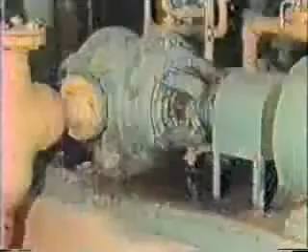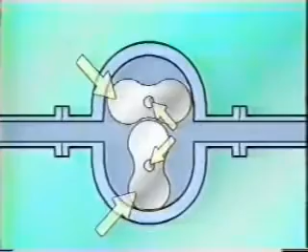The first one we'll look at is a lobe pump. Lobe pumps are a lot like gear pumps in that the process liquid is trapped in spaces and forced out of the pump, but the moving parts in a lobe pump are a little different. The lobes are attached to the ends of these rotating parts. They're closely spaced, forming a seal between them to prevent liquid leakage back to the suction. The lobes are also smooth, and that, plus their shape, prevents one lobe from meshing with the other, as was the case with gear pumps.

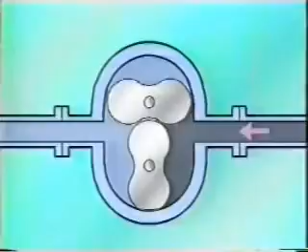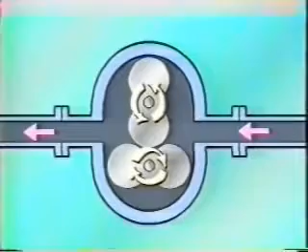Here's how the pump works. The process liquid flows into the suction of the pump. As the lobes turn, liquid is carried in the spaces between the lobes and the casing and is forced through the pump discharge. Lobe pumps are often larger than screw or gear pumps.

Another common type of rotary pump is known as a rotary vane type pump. Rotary vane pumps use a kind of sweeping action that pushes a liquid through the pump.

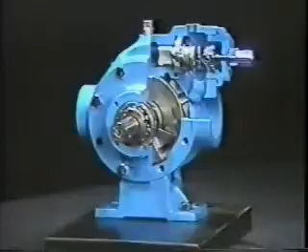This particular vane pump is commonly called a sliding vane pump. The pump shaft is attached to a rotor that turns with the shaft. The rotor is offset away from the center of the casing. The pump suction is here, and its discharge is around on the other side, which you can't see here. The rotor contains vanes, which are housed in slots inside the rotor. The vanes can slide into the center of the rotor or toward the outer edge of the rotor.

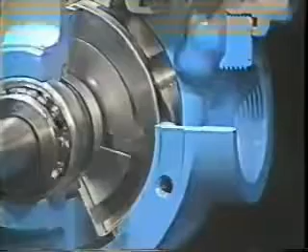As the rotor rotates past the suction, centrifugal force causes the vanes to slide outward, trapping the liquid. This creates a reduced pressure that forces more liquid into the suction. The vanes then sweep the liquid along this path and carry it to the discharge.

We'll use this illustration to describe how the liquid gets to the discharge. The suction is here, and the discharge is here. This is the rotor, which is slightly offset from the center of the casing, and these are the sliding vanes. Remember, the vanes trap the liquid at the suction and carry it toward the discharge.

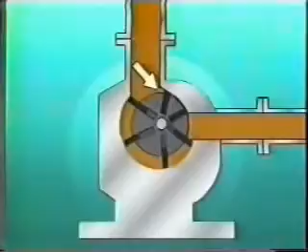At the discharge, the pumping area narrows. Liquid can't flow back to the suction, so it's forced out the discharge. The vanes then slide outward to pick up the liquid at the suction, and the process repeats.

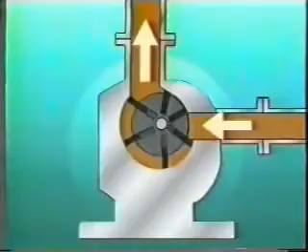The vanes in a sliding vane pump are often made of a plastic or carbon material. These materials offer little friction, so they don't wear that fast, even though they're in constant contact with the pump casing.

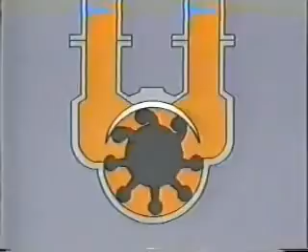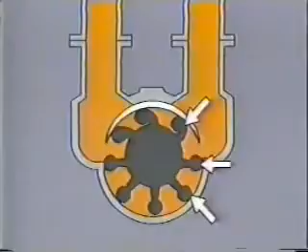Some vane pumps operate a little differently, like this one, which is often referred to as a flexible vane pump. A flexible piece is connected by a shaft to the pump's driver, which isn't shown here. The flexible piece has a series of vanes attached to it. The vanes are made of a flexible material, such as rubber or plastic.

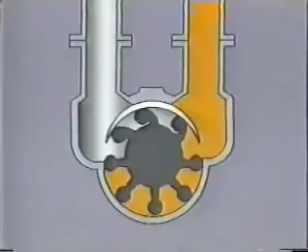They rotate around the inside of the pump casing and keep a tight seal with it by bending at places around the casing. Liquid flows into the suction of the pump and is trapped between the vanes and the casing, much like the other pumps we've seen so far. The action of the vanes traps the liquid and pushes it out the discharge.

The big advantage of using flexible vanes is that they bend to form a tight seal with the casing. This principle is used extensively in pumps that draw a vacuum on a process. The flexible vane pump we just looked at can also be used for caustic and corrosive applications. Since the rotor is often made of rubber, plastic, or some other flexible material, the pump can operate in many caustic or corrosive environments.

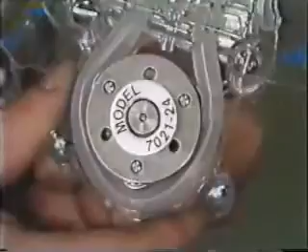In some other applications, it's critical to keep the process liquid away from all of the pump's moving parts. This type of pump is one of many that can be used in those cases. It's known as a tubing pump. The pump is small and basically self-contained. The process liquid flows through a tube that runs around the outside of the pump.

A series of rollers is mounted on a rotating cam that is attached to the pump's driver. As liquid enters the suction, the rollers compress the tube that contains the liquid, trapping the liquid inside the tubing. The rollers then force the liquid through the tubing and finally through the discharge.

Since the liquid flows through a small tube, the tubing pump doesn't have as high a flow rate as some of the others we've seen, but it does have several uses. It's often used as a sampling pump for corrosive or toxic liquids. The advantage of a tubing pump is that the liquid doesn't come in contact with any of the moving parts of the pump. A tubing pump is just one of many types of rotary positive displacement pumps.

During the past few minutes, we've looked at a few different kinds of rotary pumps, each of which uses a different rotating device to push or positively displace liquid. Up to this point, we've seen how different types of positive displacement pumps operate. Your job will likely include starting up and shutting down a wide variety of positive displacement pumps. We'll examine a typical startup and shutdown sequence for a reciprocating pump when we come back.